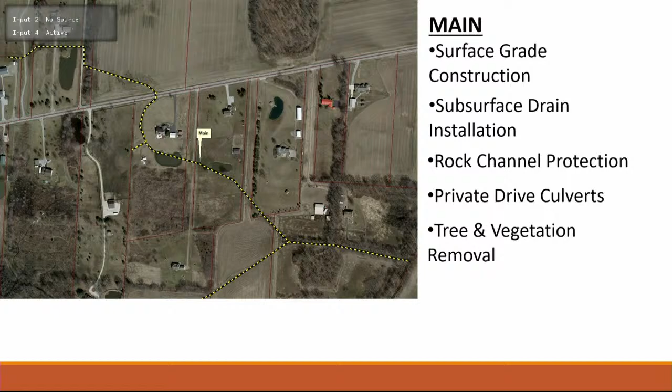The main will consist of surface grade construction, subsurface drain installation, rock channel protection, private drive culvert installations, and tree and vegetation removal. Lateral number 1, as you can see there on the map, will consist of surface grade construction and subsurface drain installation.

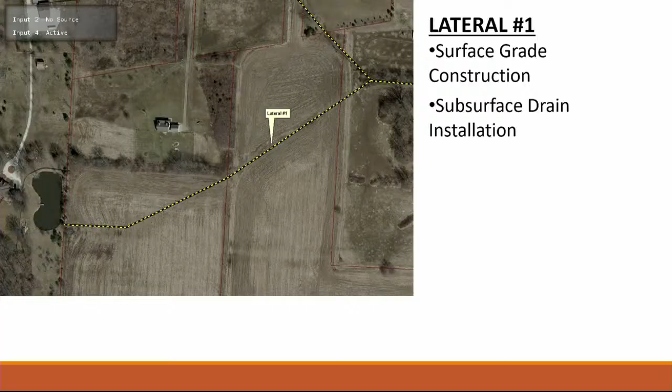We have a drone video that starts at the top end of the main, and it will continue downstream. So we're flying basically over top of the proposed center line. This is Kilbourne Road. We're getting close to crossing over.

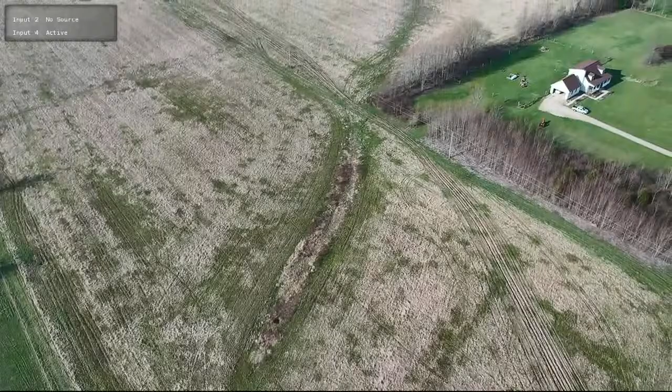And here we're going to turn and look back upstream. This is looking from the junction of the main and lateral 1, looking back upstream the path of lateral number 1. And then continuing back on down the main. And that would be the junction with Little Walnut Creek right there.

And when was this? Early April, I believe the second week of April of this year.

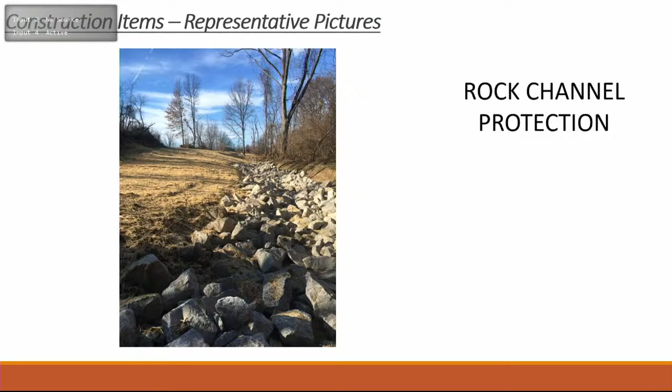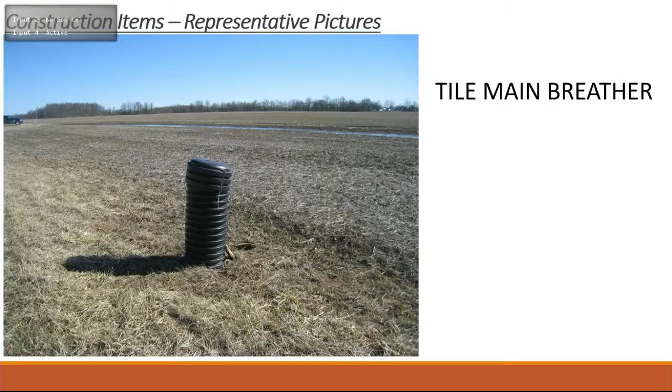Project cost estimate: the main is estimated to cost for construction $68,769.50. Administration, construction inspection, drainage maintenance pay-in, $12,389.20. Contingency amount of $11,451.24, for a total estimate of $92,609.94.

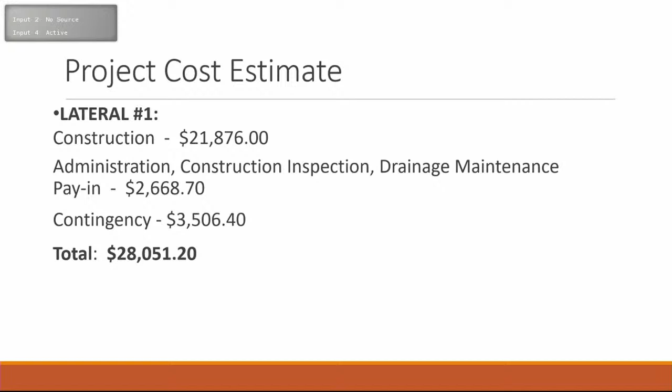Lateral number 1 for construction is estimated at $21,876 even. Administration, construction, inspection, and drainage maintenance, $2,668.70. Contingency, $3,506.40, for a total estimate of $28,051.20.

Calculation of assessments: the revised code instructs the engineer to calculate assessments to property owners based on the benefits received. It further goes on to say that lands that have been removed from their natural state by deforestation, cultivation, artificial drainage, urban development, or other man-made causes shall be considered as benefited by an improvement required to dispose of the accelerated flow of water from the uplands.

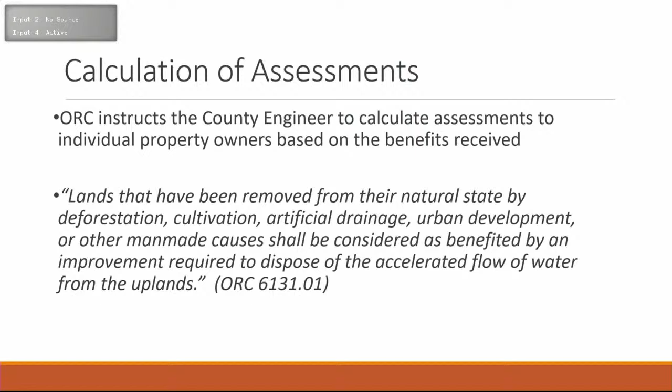The formula used to calculate the assessments is: acres benefited times a land use factor times percent use equals the parcel assessment factor. The parcel percentage share is then derived by dividing the parcel assessment factor by the sum of all assessment factors, and the parcel assessment is then the parcel percentage share times the total estimated cost.

Landowners have a couple different options to pay an assessment if the project's approved. They can pay the full assessment up front within 30 days of the final hearing, in this case by July 7th, 2021, also giving notice by June 28th, 2021. The assessment can also be placed on the property tax bill as a special assessment. Having the assessment placed on the property taxes will include interest and other fees if the project's bonded, and auditor treasurer collection fees.

We'll run through a quick example here. This example assumes no upfront payments to the project. The total estimated construction cost, all parts, minus direct assessments, equals $120,661.14. The average assessment, not including right-of-way, is $4,601.70, or a 3.8% share of the project.

Debt issuing fees, bond counsel, bank, things like that, $8,000 estimated. Bond interest, 4% estimated, equals $4,826.45, giving us a total estimated cost, adding all those figures together, of $133,487.59. 3.8% share of this total estimated cost is $5,072.53.

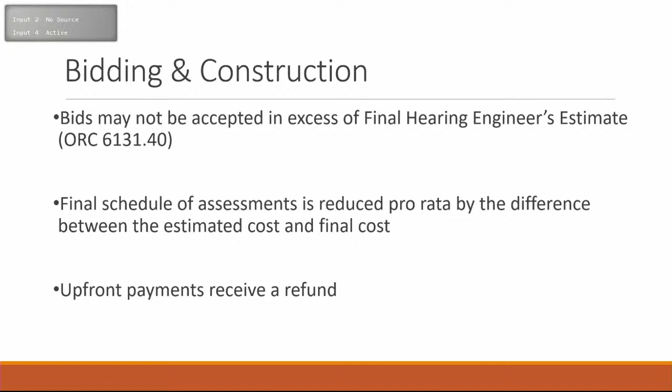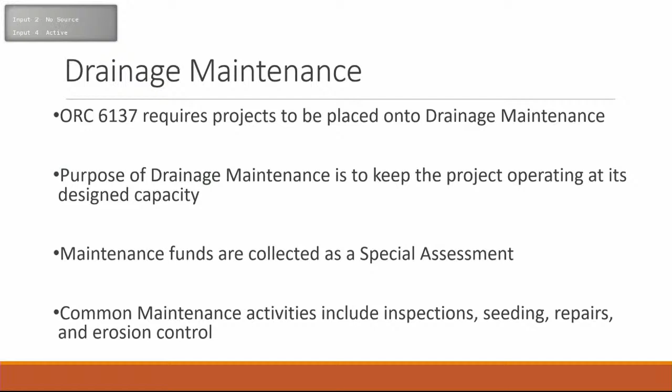Drainage maintenance. ORC 6137 requires projects to be placed on drainage maintenance following completion of construction. The purpose of maintenance is to keep the project operating at its design capacity, and maintenance funds are also collected as a special assessment to the property owners. Common maintenance activities would consist of inspections, seeding, repairs, and erosion control, among other things.

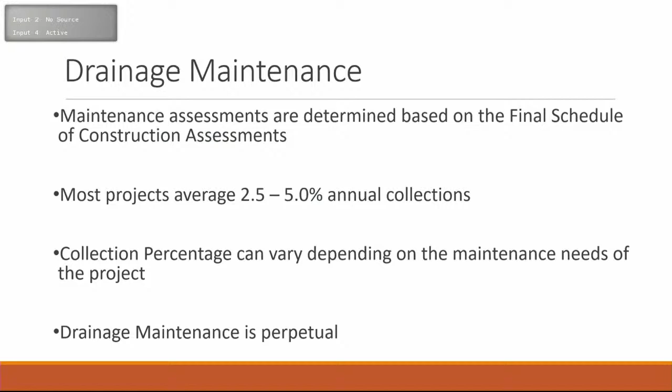Maintenance assessments are determined based on the final schedule of construction assessments. Most of our projects average between 2.5% to 5% annually on the collection percentage. This percentage can vary depending on the maintenance needs of the project, and drainage maintenance is perpetual. That assessment will be on the project forever.

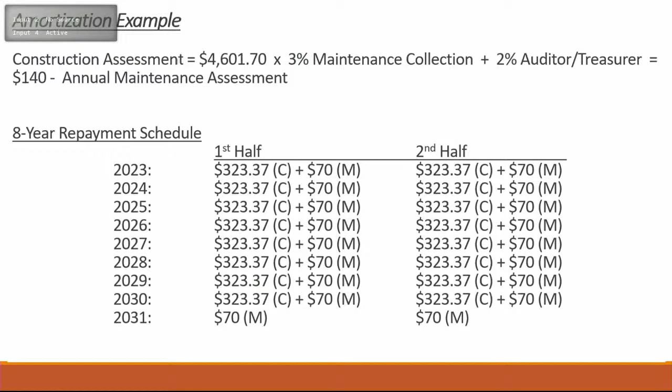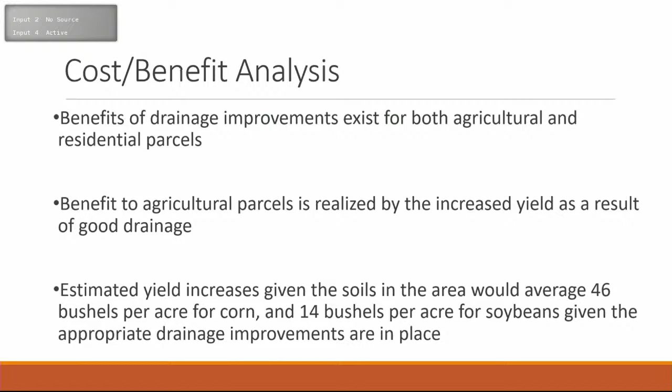Cost benefit. Benefits of drainage projects exist for both agriculture and residential properties. Benefit to agricultural parcels is realized by the increased yield as a result of good drainage. Estimated yield increases given the soils in the area would average 46 bushels per acre for corn and 14 bushels per acre for soybeans, given the appropriate drainage improvements are in place.

Benefits to residential parcels focus on quality of life, neighborhood perception, and home site sewage treatment systems. A failed home site sewage treatment system can cost $15,000 to $25,000 to repair or replace. New developments average between $1,000 to $3,000 per lot spent on providing adequate drainage outlets. Given the 12 residential parcels in the watershed, this would assume a $12,000 to $36,000 benefit at minimum.

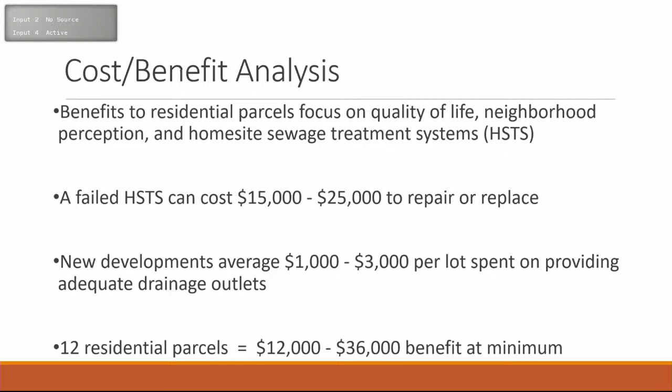The board has several decisions before it today. You can approve main and lateral 1. You can approve main and deny lateral 1, or you could deny all parts of the project. Approval of any part will require setting a repayment period and whether to bond, confirming the schedule of assessments, and ordering the project be advertised for competitive bid.

If the decision is to deny the project in whole, it is recommended to distribute costs incurred to this point to the landowners in the same ratio as determined by the final schedule of assessments. The estimated costs to date are $5,000.

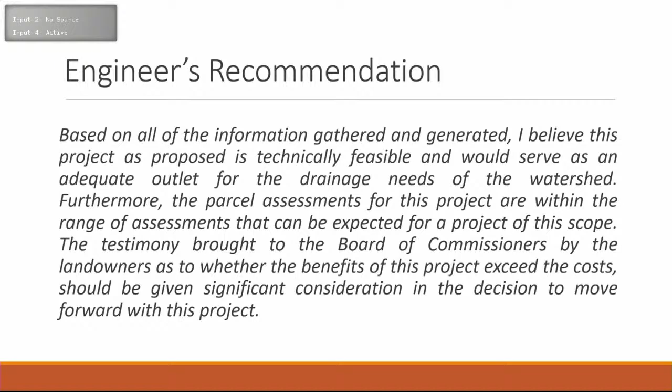The engineer's recommendation is stated in the final hearing report. For purposes, I will read it today. Based on all of the information gathered and generated, I believe this project, as proposed, is technically feasible and would serve as an adequate outlet for the drainage needs of the watershed. Furthermore, the parcel assessments for this project are within the range of assessments that can be expected for a project of this scope. The testimony brought to the Board of Commissioners by the landowners as to whether the benefits of this project exceed the costs should be given significant consideration in the decision to move forward with this project.

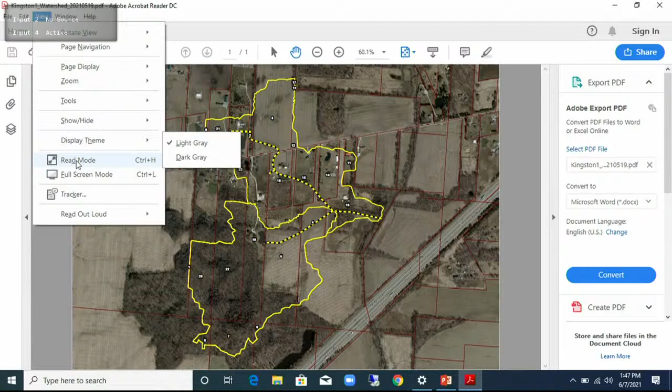Thank you, Brett. I'll open up to questions from my fellow commissioners. Do you have any questions at this point? Well, not at this point. The report's very helpful to go through the slides in the report we've read, so I do have questions as we proceed. And I have no questions at this stage either.

We are going to, some representative of the county engineer's office is here. We have an exception, as I read to you, the board will acknowledge receipt of any exception to the assessment or claims for compensation or damages that were filed with the clerk of the Board of County Commissioners. I'm going to ask the representative of the county engineer's office to come forward.

Why don't you introduce yourself first of all? Commissioner Merrell, could you remove your mask, please? But yes, do you want to accept that exception for consideration before we move on? Do we need the engineer? Yes. Okay, good call. So, go ahead.

Resolution number 21-497, in the matter of the Delaware County Board of Commissioners accepting for consideration the exception to the assessments filed by Charlie Ruffett and Honduras Farms LLC for the Kingston Township number 2017-1 Drainage Improvement Petition Project.

So moved. Second, discussion? Discussion, and we go ahead and vote and then have the discussion. Eric? This is merely to accept the filing, and it'll become a part of the record, and then you can have a discussion as to whether there are merits to it.

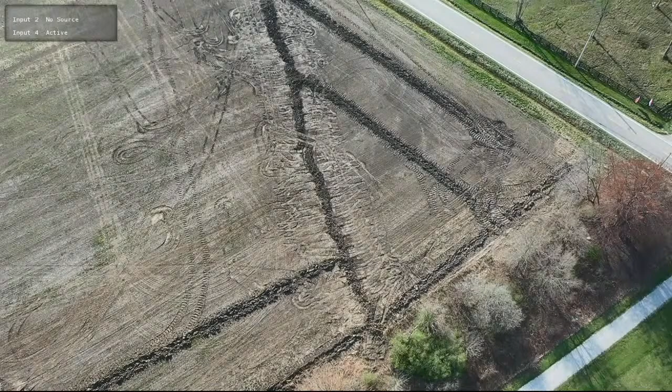Brett, you want to talk us through it? Could you pause it here? You see the marks in the field, is that the work that you did? Correct, so those are the laterals, but if you let it go a little more you'll see right where the main is, right there at the bend. And you can see a breather, if you stop it there, there's an orange pipe, so that's where the main goes under the road.

There was so much pressure that when we cut it and tied it into ours, it ran for 3 days, and that's all the water coming from the petitioner signers on the north side of the road that was backed up into them and backed up on us. So none of the subsurface water goes south of the road any longer.

And sir, if you don't mind showing me where the culverts are. Is that what it is there, behind it? They're hard to see, but the road culverts are right here. Those are twin 24-inch culverts.

So the water is going across the road at that culvert, correct? Yes, the above ground water. The subsurface water just continues on east in subsurface pipes, as I understand.

Again, I have not inspected the work that was done. It's not part of the petition, it's not a public improvement. I can't 100% say that I've inspected the work or had one of our staff inspect it. This is unusual, we don't typically get one of these, so we're asking questions that may seem simplistic.

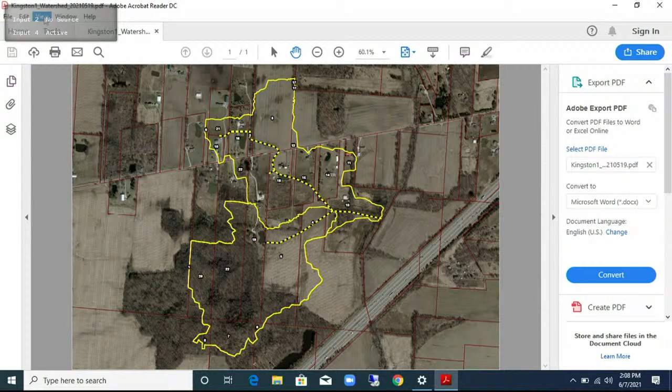It's going downstream on that side of the road. All it's doing is entering the creek further upstream a few hundred yards, entering the same exact creek. In the same watershed? No, different watershed. Where it enters, it's in a different watershed and flows south and then into it. We'll show you on the map. The main, I'm saying, wouldn't need to extend under the road to the north, because I've already tied into it and addressed the issue.

Okay, here's a bigger picture. North of Kilbourne Road, we did have a couple signers of the petition also. So in order to satisfy the intent of the petition from their perspective, we would have to extend the surface and subsurface to their properties. It crosses there, that's open. But that's a different watershed, right? Different watershed, yeah.

Do you have any idea when a rainstorm happens, how much water would exit the watershed by virtue of the subsurface, and how much would exit by virtue of the surface? We've ran some rough calculations based upon agricultural drainage. I don't know what they designed the system to, but we designed it to a 3/8 inch drainage coefficient. I'm not sure if that's what you had designed the system to, Mr. Ruffin. I never checked on that. You might want to explain what a 3/8 inch means. 3/8 inch rainfall goes into the tile, the rest of it goes off overland.

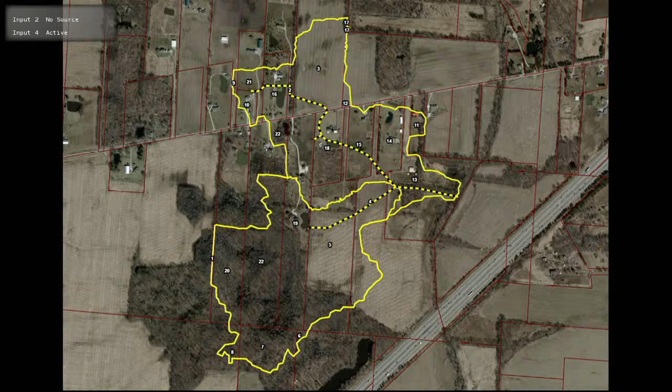I've had soil and water. Dan, you've been to my place, I don't know how many times, at least three, on 3 different occasions. There's nothing that you guys can suggest that I do as a homeowner to really fix the problem. So back to Angie's point, this entire area needs this project to go through for it to benefit all of us. And I think we're even hearing that they're not opposed to the project.

But we've been dealing with this problem over and over and over. I asked Dan before I put the pond in, I said, Dan, do you think the pond is going to solve some of the problem? And he said, well, it will until your pond fills up, and then it will just completely run all over the place. And it has continued to do that every single time that it rains a big downpour. And that May 9th storm, it was unbelievable. I could not believe the water that went all the way down Kilbourne Road, all the way to the creek.

What kind of damage have you had on your property? Just standing water, basement, any other issues, or just standing water? The house, prior to my ownership, the house did flood. The basement flooded, you can see it. As I have not had any flooding to my house yet, that doesn't mean that it couldn't occur at some point. So no, I've not had any property damage as of yet.

But to your point about mowing the lawn, it's impossible. When it rains, it's a swamp. It's a swamp. So, okay, thank you.